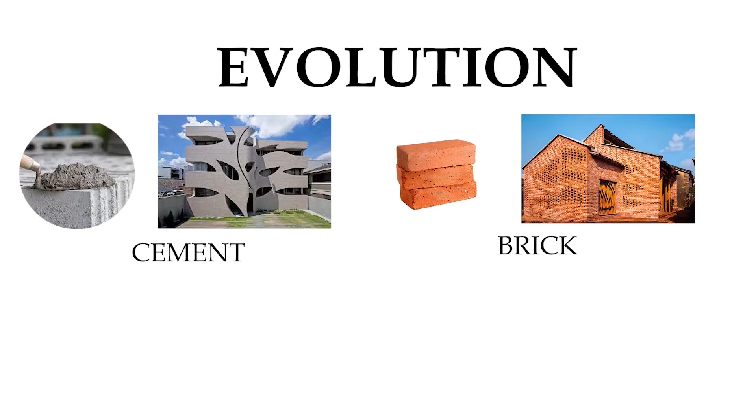Material is the integral part of building structure because building material signifies the structural existence, structural importance, constructional behavior, and also visual impact. There is an evolution of materials used for building constructions. Stones, leaves, branches, clay, mud were used in the primitive age. After that, some composite materials like cement, bricks, reinforced cement concrete with steel or other metals, concrete, etc. came. In our first and second semester, we have studied about cement, mortar, concrete, adhesives, and finishes.

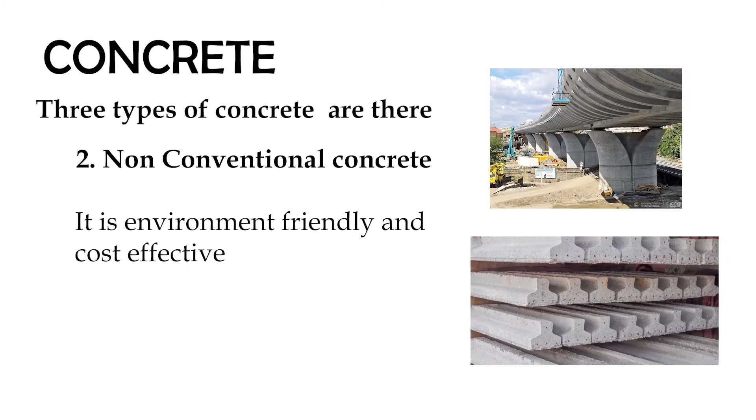Cement. It is much economical. It has a high thermal mass. Mortar. It is a binding material that binds building materials like bricks and stone into a solid. It protects building materials from fire in emergency. Concrete. Three types of concrete are there. Number one is conventional concrete, which was initially expected to resist only compressive loads. Number two is non-conventional concrete, which is task-specific, environment friendly, and cost-effective.

Number three is pre-stressed concrete, which is a form of concrete where initial compression is given in concrete before applying the external load. Adhesive. It is also known as glue, cement, paste, which is a non-metallic substance applied to one or both surfaces of two separate items. Finishes. These comprise plastering, pointing, painting, varnishing, and distempering. In our third semester, we have studied about the materials which are used for doors, windows, and damp-proofing course.

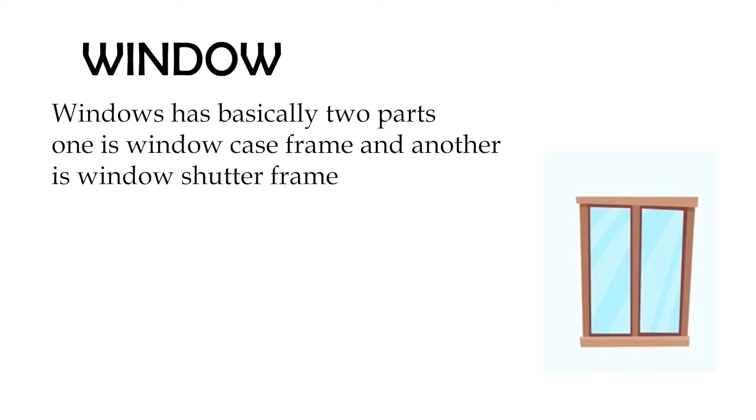Window. Window has basically two parts. One is window casing frame and another is window shutter frame. Window frames are made of timber, steel sections, aluminium sections, concrete, and stone. And the window shutter frame is made of timber, steel sections, and aluminium sections.

The door has also two parts. One is door casing frame and another one is door panel. Door casing frames are made of timber, steel sections, aluminium sections, concrete, and stone. Door panels are made of timber, mild steel sheet, corrugated steel sheet, hollow metal, metal covered plywood. Damp-proof course. Damp-proofing is a course which protects a building from moisture for a long time.

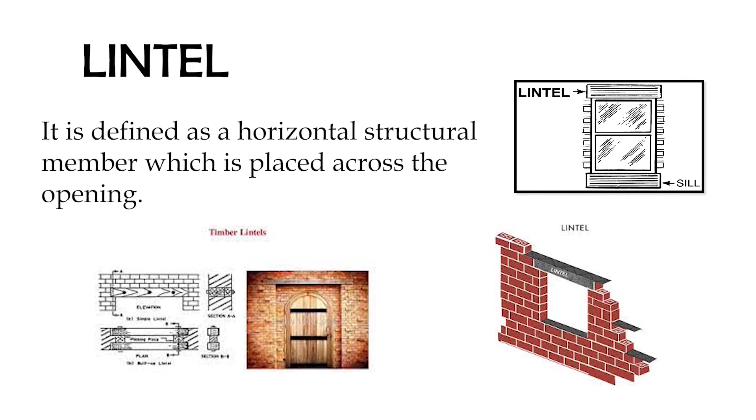In our fourth semester, we have studied about lintel. It is a horizontal structural member which is placed over the openings like doors and windows. Timber, stones, bricks, reinforced concrete, steels, and reinforced bricks are generally used in lintel. We have studied about arches also in our fourth semester. Various types of materials like bricks, stones, wood, monolithic concrete, precast concrete, reinforced cement concrete are used in arch construction.

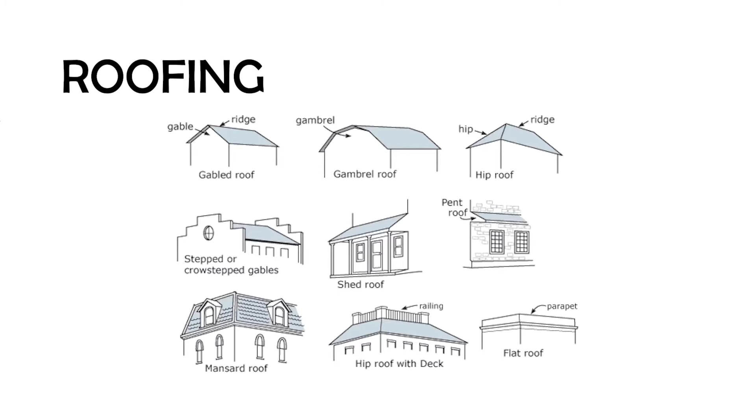In fifth semester, we have studied about partition wall. Generally, the materials used to construct partition walls are reinforced brick, hollow and clay brick, glass, straw board, plaster slab, metal lath, AC sheet, wood, lumber, etc. Roofing was also studied in our fifth semester. Roofing is an essential part of a building construction. Roofing material is mostly dependent on the climatology of the location of the building.

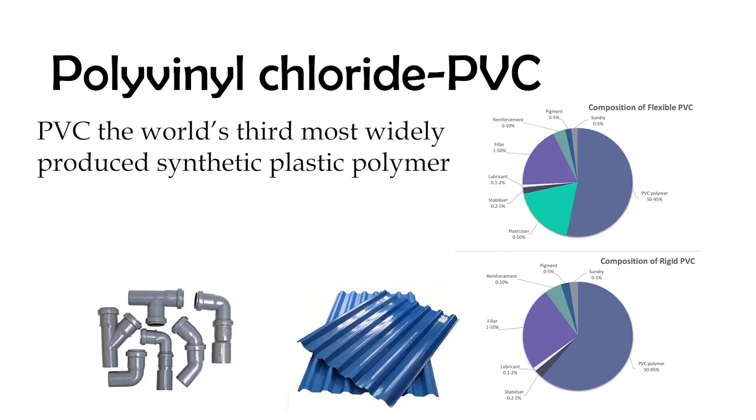There are also some new materials that are being introduced in the market. These are known as advanced materials. These materials include polyvinyl chloride, fiber reinforced plastic, etc. Polyvinyl chloride is the world's third most widely produced synthetic plastic polymer. It consists of 57% chlorine and 43% carbon. Fiber reinforced plastic is also an excellent choice of material for the construction of chemical storage tanks, piping systems, etc. There are many other materials that are more durable and fire resistant than the older materials we generally know now.

Foundation. In our third semester, we studied about foundation and its types. Foundation is a substructure placed underground that anchors the building to its position. Foundations are of two types: shallow foundation and deep foundation. Shallow foundations. These are mainly used in low rise buildings.

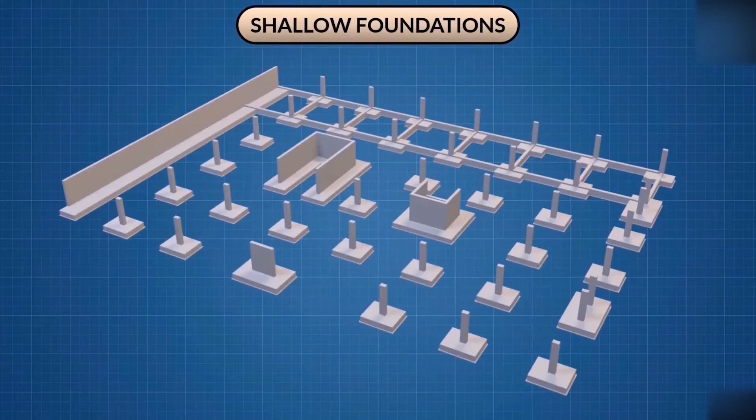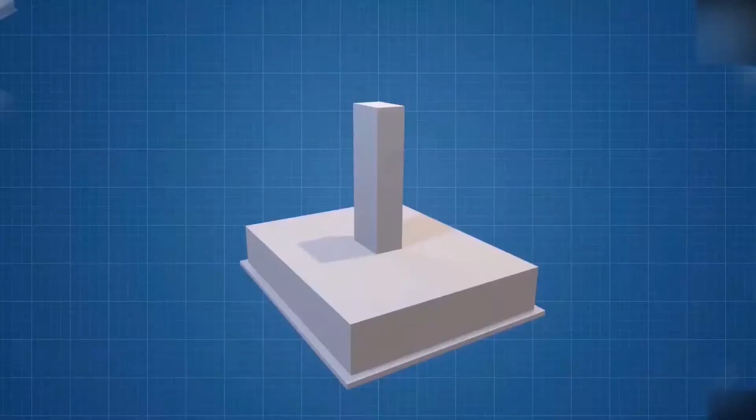The foundation takes the load from superstructure in the form of vertical or lateral loads or moments. In return, the soil exerts a reaction force upwards that tends to bend the base. Top part comes in compression and bottom part in tension. Therefore, the main reinforcements are provided in the bottom. This is how the reinforcement steel bars are provided.

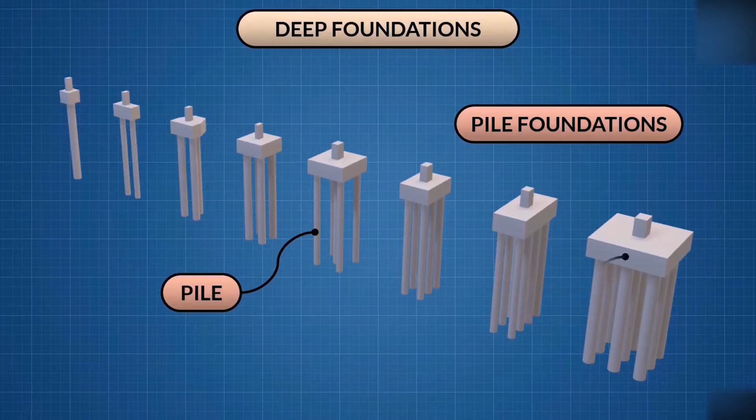Brick bonds. In third semester, we have studied about brick bonds and its various types. Brick is a type of block composed of dried clay which is used to build pavements and other various elements of masonry construction. The largest surface of brick is called stretcher. The shorter surface is called header, and the depression of top surface is called frog.

Four types of brick bonds are generally used in brick masonry. Number 1 is stretcher bond. Number 2, header bond. Number 3, English bond. And number 4, Flemish bond. Stretcher bond is the commonest bond used today and the least interesting in appearance. It is used mostly in interior settings because of its thickness of one half of a brick.

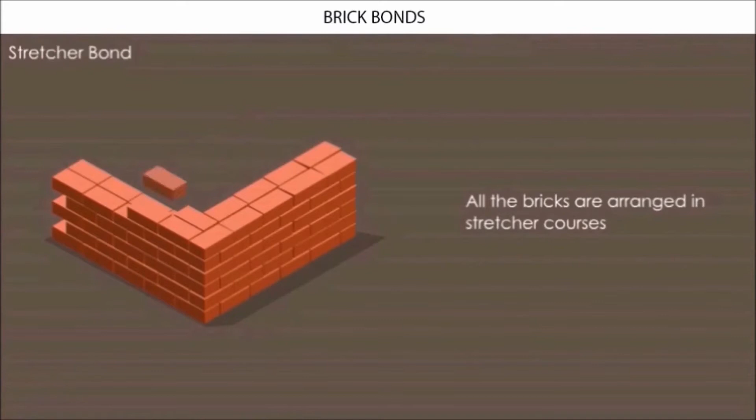Header bond is a masonry bond consisting of header courses exclusively. It is mostly used for residence and safety partition garden boundary wall. English bond consists of alternate courses of header and stretcher bond. This is the most commonly used bond for all wall thickness. In this bond, the vertical joints of the header courses come over each other. Similarly, the vertical joints of the stretcher courses also come over each other. This bond is considered to be the strongest bond.

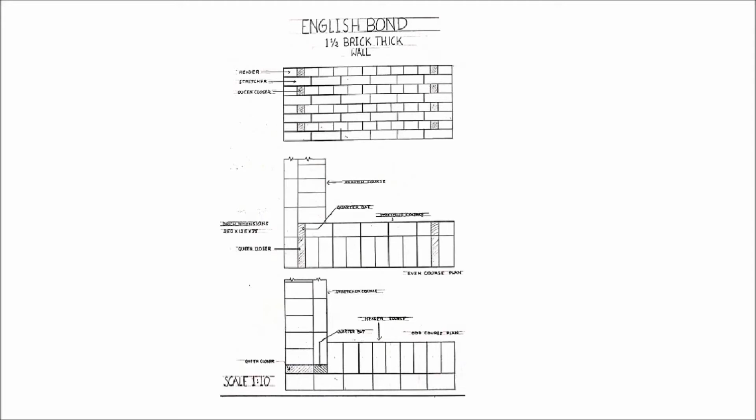In English bond, every alternate header comes centrally over the joint of two stretchers in courses below. Walls of even multiple of half bricks, for example 1 brick thick wall, 2 brick thick wall, present the same appearance on both faces. Walls of odd multiple of half bricks, for example 1.5 brick thick wall, 2.5 brick thick wall, will show stretchers on one face and headers on the other face.

Another one is Flemish bond, which is a brick construction pattern of alternate stretchers and headers for each course. This is very acceptable because it is economical, as brickbats are used. On the other hand, more mortar is used due to use of bats. But it is hard to build and it is comparatively less strong for the wall thickness of more than 30 centimeters. In Flemish bond, partly continuous vertical joints appear in the structure.

Double Flemish bond has a similar appearance from both sides of the face in the front and back elevation. In single Flemish bond, the exposed surface of the wall consists of the Flemish bond and the backside surface consists of English bond in each course.

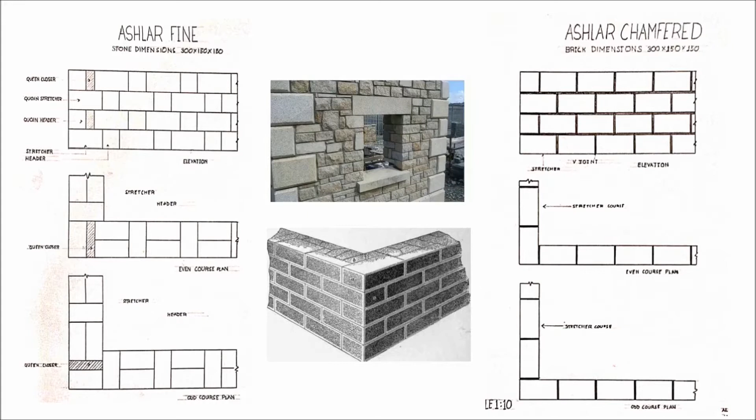This is stone masonry. We have studied about stone masonry and its types in our third semester. Stone masonry is basically of two types. One is ashlar masonry and another one is rubble masonry. Ashlar is finely dressed stone. In ashlar fine masonry, each stone is cut to uniform shape. In chamfered masonry, a strip is provided to 25 mm depth at 45-degree angle. That's why the exposed face is chamfered.

Rubble masonry is a type of stone masonry in which the stones used are obtained from nature. It is rough dressed with wider joints, in contrast to ashlar masonry wherein stones are given a fine finish and joints are also kept thin. Rubble masonry is more preferred than ashlar because there is a difficulty in dressing most types of stone. And for economical construction also, ashlar masonry is quite costly. That's why rubble masonry is more preferable than ashlar masonry.

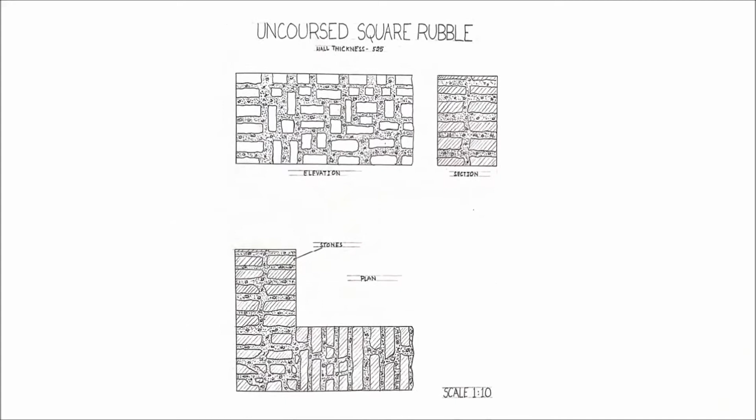Rubble masonry is of two types. One is square rubble masonry and another one is polygonal irregular rubble masonry. In square rubble masonry, stone faces are given a straight finish. Voids are filled with mortar and stone chips. In polygonal rubble masonry, the stones are roughly hammered and pitched into irregular polygonal shapes.

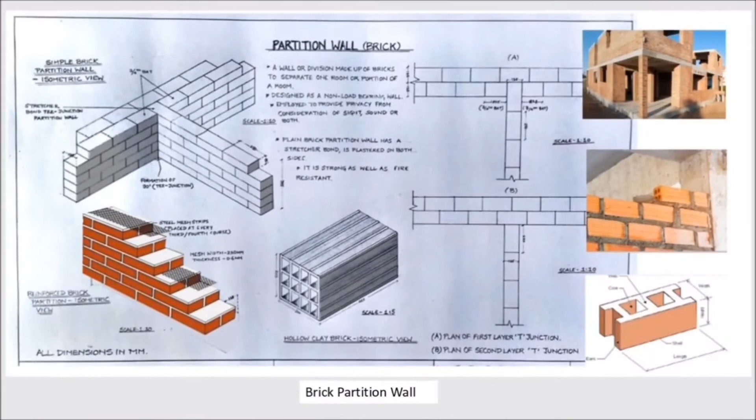These are some photographs of hollow clay blocks, which are generally made up of clay or terracotta and are hollow on either sides. In reinforced brick, wire mesh or hoop iron or steel bar is provided.

Plaster and concrete partition is constructed by setting 2 by 2.5 cm channels vertically and fixing metal strips. Strips are galvanized with iron wire or mild steel bar. It can be either precast or cast in situ. Special concrete posts are used for the construction of this wall.

Timber partition wall consists of a wooden framework which is either supported on the floor or on the side wall and is not suitable for damp locations, neither soundproof nor fireproof, lighter in weight and easy to construct.

Timber framed glass wall consists of glass surrounded with a combination of solid and engineered wood. This type of wall consists of a wooden framework and this type of wall provides good aesthetics.

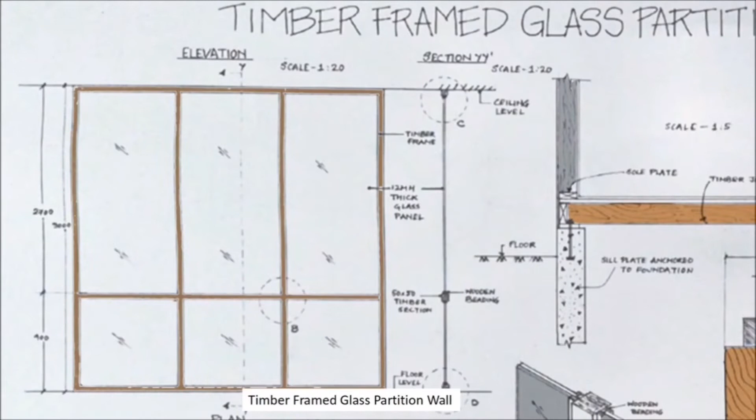For steel frame glass partition wall, the framing is done with steel and this provides maximum sound insulation and security. Mostly, this wall can be seen in modern offices, restaurants and cafes.

This slide is about composite glass partition walls. The walls are built of a combination of 2 or more masonry units of different types of materials that are bonded together. This is a video about the installation process of composite glass partition wall.

At first, steel framework is done and then plaster boards are used on both sides. As a modular, versatile, demountable panel, they can be quickly erected to any configuration required and come in a variety of specifications. Next slide is about GI frame drywall partition wall.

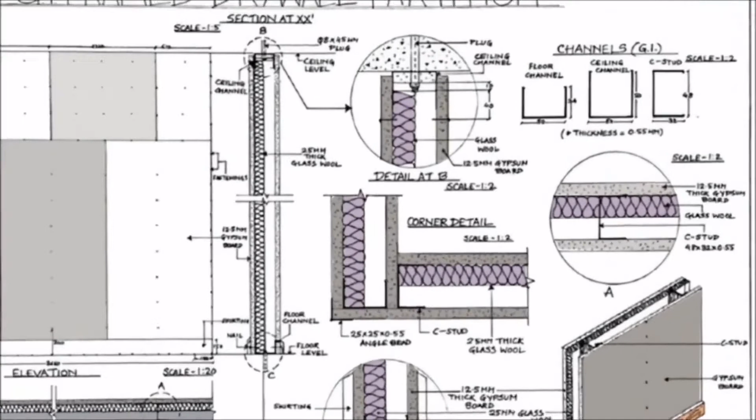Drywall materials include plywood and wood pulp, asbestos, cement board and gypsum. This is a soundproof wall. Double layered drywall partition walls, as the name suggests, have a double layer of drywall. Double layers increase the mass and increased mass increases sound deadening. The benefit of a double layered drywall is less noise penetration. Here is a short animated video about the construction process.

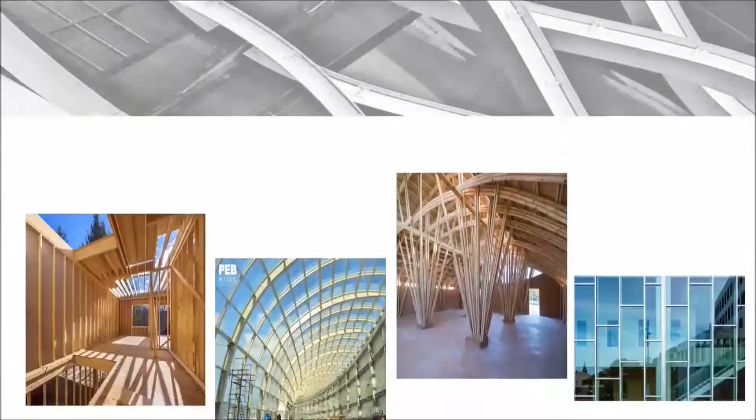Advanced building materials represent a new generation of construction materials which demonstrate exceptional properties. Through this, new technologies are integrated into both residential and commercial buildings and infrastructures to make them smarter, more sustainable, energy efficient, and secure. The following sheets are based on our assignment to design a stage backdrop.

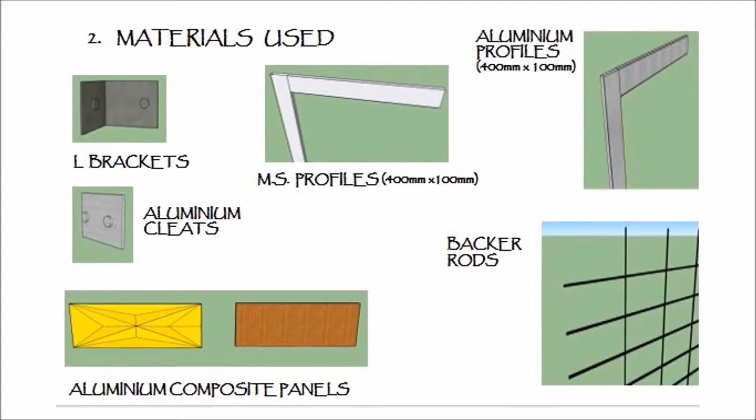The aim of the design was to make a simple but eye-catchy backdrop for the stage by only using aluminium composite panels. The mostly used materials are L bracket, MS profile, aluminium cleats, backer rod, and two types of ACP sheets. The first type is extruded gold finish, and the second one is the wood finish flat ACP. In this exploded view, we can see each layer of the total composite wall.

Here are the fixing details. At first, L brackets are fixed on the wall, then the basic framework is created using the MS profile, which is then overlapped by aluminium profile. Then, ACP sheets are placed, and backer rods are run between the grooves.

The design has been done around the idea of contrast and texture. The contrast developed between the shiny extruded and matte finish flat appearances of the ACP is the main design concept. The band of wood finished ACPs running in between the gold ACPs breaks the monotony of the backdrop while also emphasizing the whole design. The 3D form of the ACP panels will create different visualizations of the backdrop.

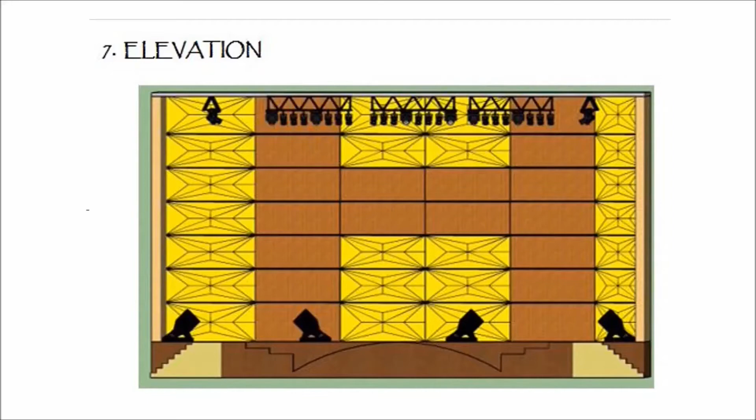We also collected a rough idea of the bill of quantities for this project. On the first sheet, we can see the elevation and the basic framework along with the skin section and details.

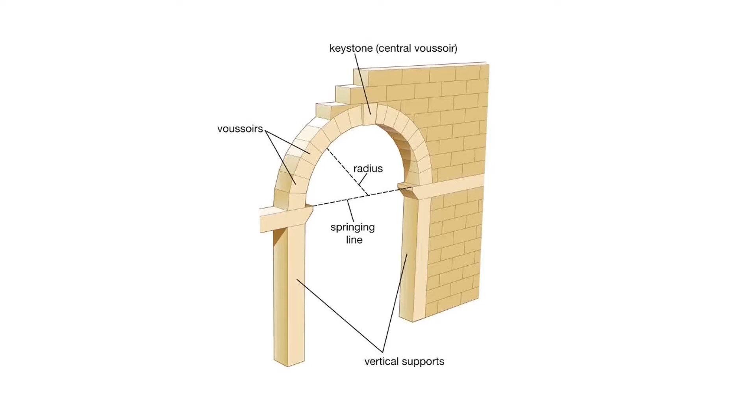In our fourth semester, we got to learn about the arches. An arch is a vertical curved structure that spans over an elevated space. It may or may not support the weight above it. These are the different parts of an arch which are shown, such as voussoirs, vertical support, keystone, springing line, and the radius. This is a sheet which is drafted by us in our fourth semester.

In this sheet, there are different types of arches such as semicircular arch, segmental arch, and flat arch. This is a semicircular arch. Semicircular arch is also known as Roman arch. This arch forms a half circle which is a major feature in all Roman architecture. A segmental arch is a type of arch with a circular arc of less than 180 degrees. It is sometimes also called a scheme arch. A flat arch is an arch with a flat lower or inner curve.

Some other types of arches are lancet arch, equilateral arch, horseshoe arch, three-centered arch, and four-centered arch. A lancet arch is one variety of pointed arch in which each curve of the arch has a radius longer than the width of the arch. Equilateral arch is a two-centered pointed arch in which the chords of the curve are equal to the span. Horseshoe arch is also called a Moorish arch or a keyhole arch. Horseshoe arch can take rounded or pointed or lobed form.

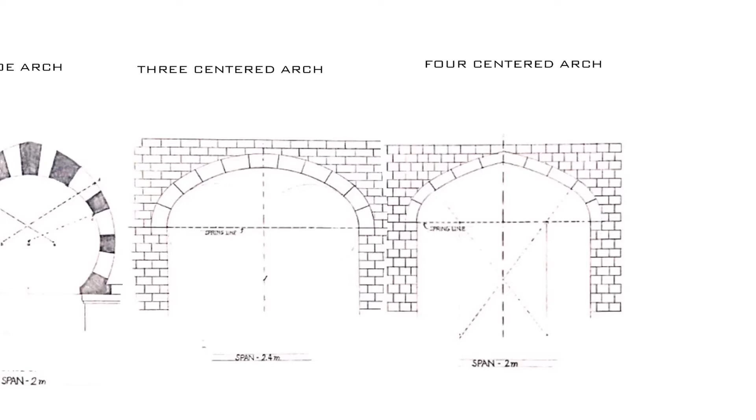Three-centered arch, an arch whose inner curved surface is struck from three centers, resulting in a shape of one half of an ellipse. Four-centered arch is a low, wide type of arch with a pointed apex. Its structure is achieved by drafting two arches which rise sharply from each springing point on a small radius. Now there is a small video on how a lancet arch is built. The vertical supports are created and then the voussoirs are placed from both sides of the curve, and at the end there is a keystone which is placed at the center.

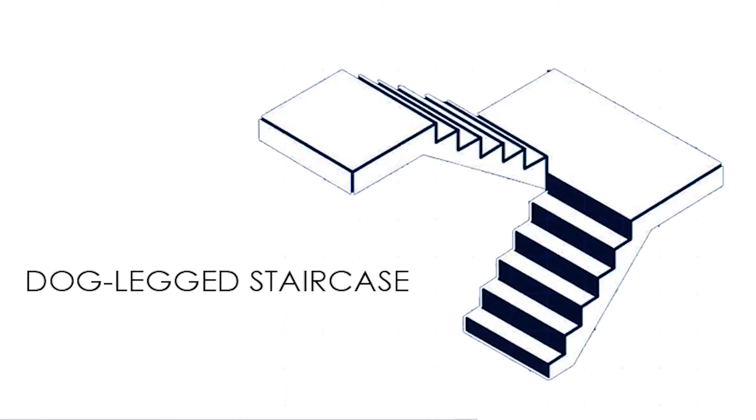Staircase. In our fourth semester, we studied about staircase. The different types of staircases are L-shaped, dog-legged, spiral, circular, bifurcated, and straight. L-shaped staircase. Dog-legged staircase. Spiral staircase. Circular staircase. Bifurcated staircase. Straight staircase.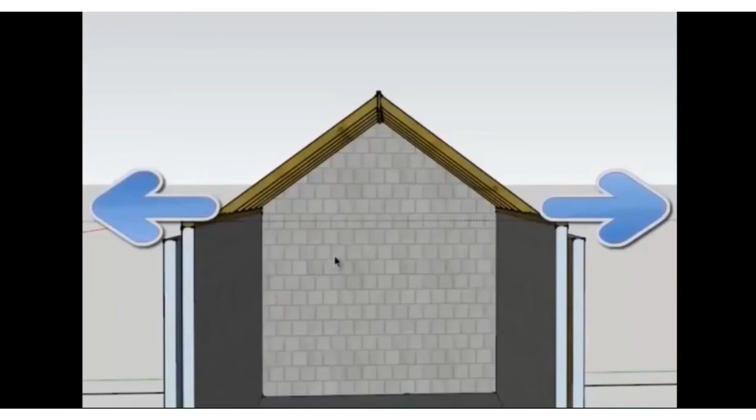In our fourth semester, we got to know about the pitch roof and its building techniques. What is a pitch roof? A pitch roof is a roof that slopes downward, typically in two parts, at an angle from the center ridge. Here are some of the sheets drafted by us in our fourth semester which contain the detail of pitch roof and its different parts. This sheet contains the plan of the pitch roof, the section of the pitch roof, the detail of the edges of the pitch roof, and some elaborate leveling of the drawing of pitch roof. In this sheet, we can see a different type of pitch roof which is covered with interlocking tiles, and its main members, that is the supporting parts, are rafters and joists.

So now there is a small video regarding the roof construction technique in which we are using joists and rafters for the roof construction. Rafters are rectangular section and they fit nicely on the wall plate. Another type of section used in construction of roof are purlins, which are associated with the struts, and they provide extra support to the rafter, hence adding extra strength to the roof. The purlins are found at right angles to the rafter and association with the struts is found on every fourth rafter. Then there are hangers which are found at right angles to the joist, keeping a strong roof.

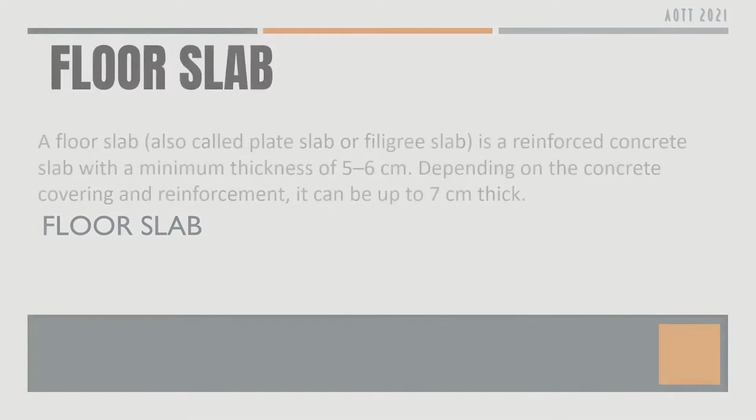In the following slides, we are going to learn about the floor slabs which we have learned in the 4th semester. A floor slab is also known as plate slab or filigree slab. This slab is a reinforced concrete slab with a minimum thickness of 5 to 6 cm. Depending on the concrete covering and reinforcement, it can be up to 7 cm thick. Now in this slide there are shown steel joists. The steel joists are open web lightweight steel trusses consisting of parallel chords and a triangulated web system, which are proportioned to span between bearing points.

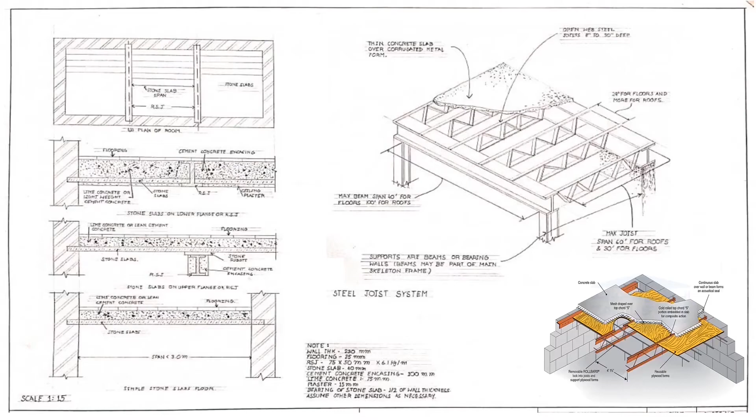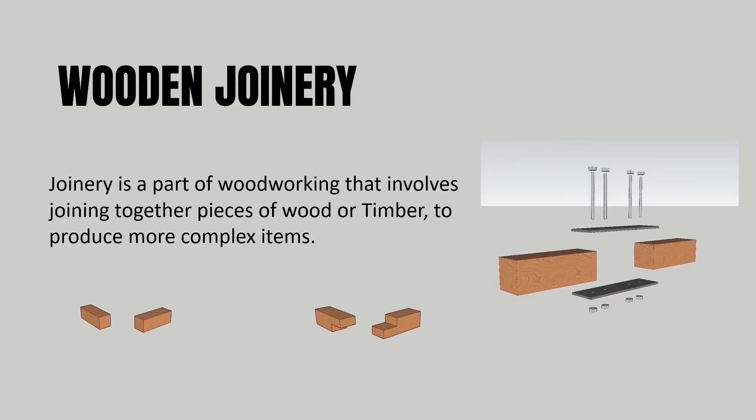We have learnt about the types of wooden joineries and the construction system in the 2nd semester and the 3rd semester. A joinery is a part of woodworking that involves joining pieces of wood or timber that helps to produce more complex items. We have studied the making of these wooden joineries in the 3rd semester.

First, in this slide a fish joint is shown. When it is desirable to join two members without reducing their section to a certain extent, then that joint, as shown in the figure below, is known as a fish joint. Here are some of the animated videos that show the construction of the fish joints, strap and bolts joint.

In this slide we can see the table splice joint, butt joint and lap joint. Table splice joint is another variation of the half lap joint. Butt joint: the end of a piece of wood is butted against another piece of wood, then this joint is known as the butt joint.

Now comes the lap joint. When the end of a piece of wood is laid over and connected to another piece of wood, it is known as the lap joint. Also, these videos help us to explain the construction systems of the table joint, matched joint and V-joint.

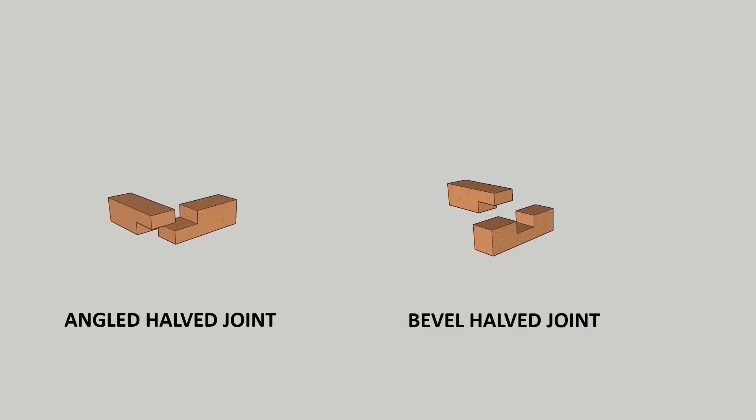In this slide we can see the types of widening joints. Widening joints are used to make wider boards by joining the narrower ones edge to edge. These videos help us to understand the construction systems of the angled halved joint and the bevel halved joint.

Now in this slide there are shown many types of joint like a dovetail joint, a notch joint, mortise and tenon joint, chase mortise joint. A dovetail joint or a simple dovetail is a joinery technique which is most commonly used in carpentry, which includes making of the furniture, cabinets and traditional timber framing. Mortise and tenon joints are strong and stable joints that can be used in many projects.

Here are some of the animated videos and also the video of our respected teacher showing the construction of a dovetail joint, also the animated videos of the types of dovetail joint.

In this slide we can see many types of joints like a housed joint, mitre joint, bird's mouth joint, oblique tenon joint. The housed joint: in this joint, the whole end of one piece of timber is accommodated or housed for a short distance into the other piece, one of which our respected teacher is showing the construction system.

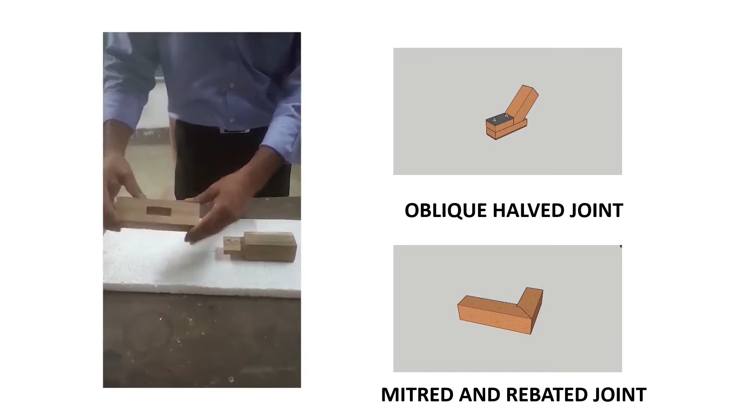We have learned about doors and windows in the 2nd and 3rd semester of our course. In this slide, we can find a typical ledged door and a typical ledged window. Frame: it is an assembly of horizontal and vertical members forming an enclosure to which the shutters are fixed. Shutters: these are the openable part of a door or a window. Head: this is the top or uppermost horizontal part of a frame.

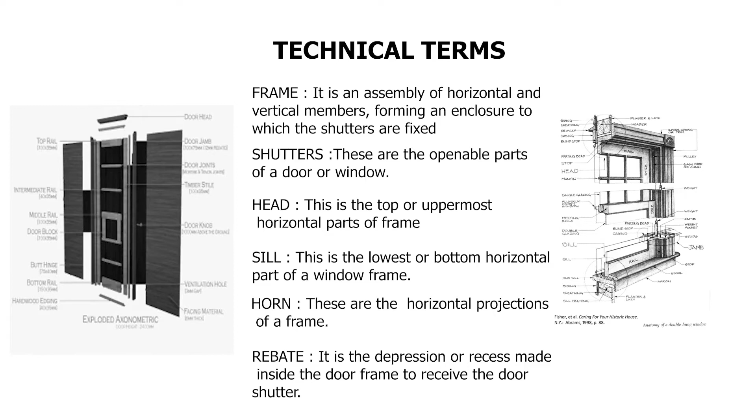Sill: this is the lowest or bottom horizontal part of a window frame. Horn: these are the horizontal projections of a frame. Rebate: it is the depression or recess made inside the door frame to receive the door shutter.

There are different types of windows with different structure and function, such as fixed windows, casement windows, awning windows, double hung windows, etc. Let's have a look at the ventilation openings of the most common window types. Fixed windows, no matter what size, offer no ventilation at all.

Next is the awning window, which severely limits the amount of opening and offers very little ventilation with respect to its size. And for the larger ones, the lower panes are normally fixed, which further reduces the amount of ventilation. Sliding windows have a fixed pane of glass which prevents ventilation. In larger ones, additional fixed panes can be found which further restrict the ventilation.

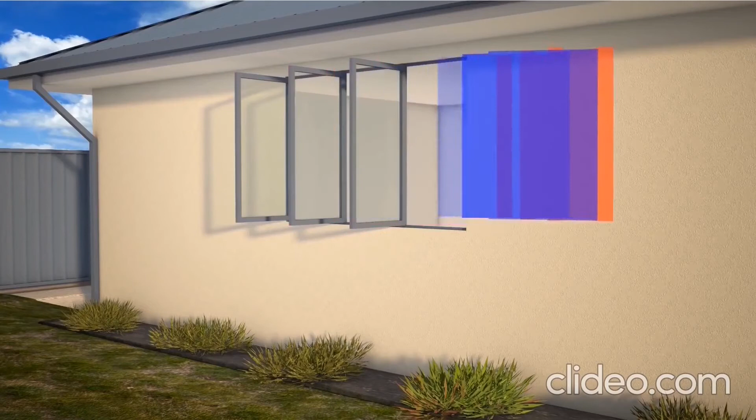In double hung windows, half of the window pane is fixed, so the ventilation through it is moderate. For larger ones, the portion of the fixed panes increases and the ventilation amount decreases. As casement windows open perpendicularly, they allow ventilation through the entire window area. For larger ones, 1/3 of the window pane is fixed and that decreases the amount of ventilation.

Louver windows have no fixed panels; the blades open horizontally. This type of window allows ventilation through the entire part of it. Even in the large ones, the amount of ventilation is comparatively higher than any other windows. So, if we represent graphically the amount of ventilation these kinds of windows offer, here comes the result.

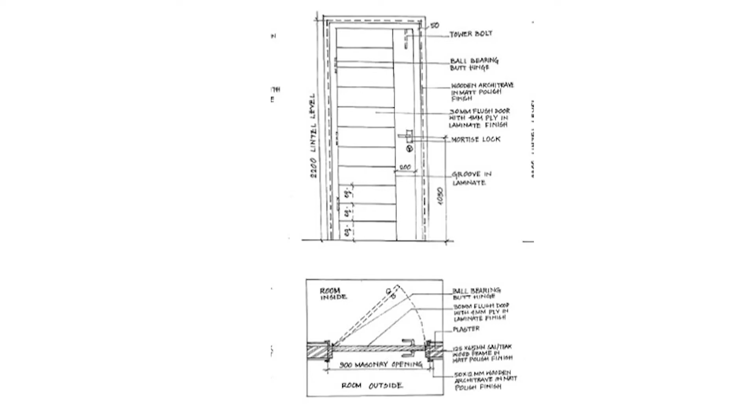The size and materials of a door may vary as per the location and their requirements. For a toilet, the door size is kept the minimum, where for a room it is moderate, and for other areas the size of a door increases. The materials and size of a door depend on the users of a particular place.

We have also learned about choosing the location of a door or a window. For the best space utilization, the number of doors should be kept minimum, but at least 2 openings should be there. If there are 2 doors in a room, the doors should preferably be located in opposite walls facing each other so as to provide good cross ventilation and free circulation of air in rooms.

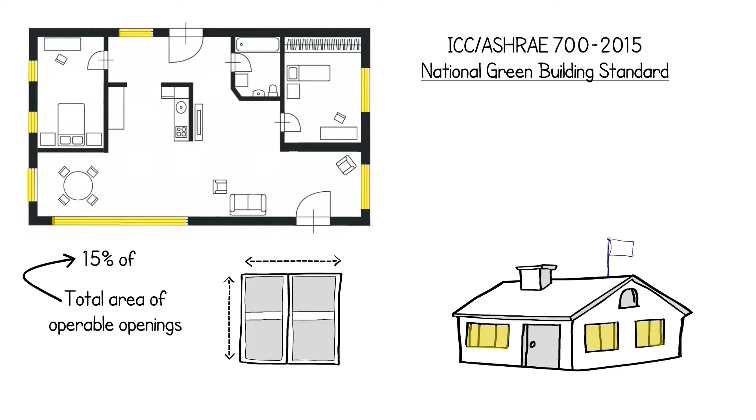If the windows are placed adjacently, the cross ventilation works very less. If in a room the openings are in only one wall or the windows are placed adjacently, in that case, the possibility of cross ventilation becomes very limited. According to the National Green Building Standard, for proper ventilation, the size of the window should be 15% of the total conditioned area.

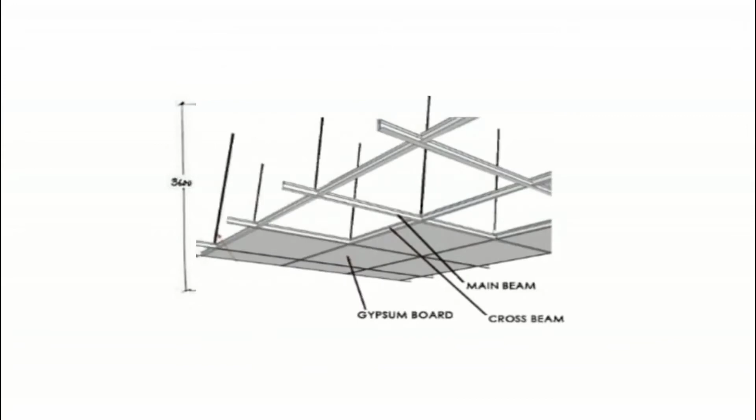In this sheet, we have drawn all the details of gypsum board drop ceiling. This is basically used for acoustical purposes in the theatre hall as it has high sound absorption property. It is lightweight, flexible, and fire and moisture resistant. Gypsum board panels are tough and economical and are fast replacing other ceiling materials such as plaster of Paris, as they are used for renovating old ceilings too.

Working drawing. Drawings for the proper construction of a building, for carrying out the various trades in accordance with the design or intention of the architect, and for obtaining estimates of cost. They will consist of plans, elevations, sections and details augmented with specifications. Purpose: the primary role or function of working drawings is to convert design data into construction information and to clearly communicate that information to the building industry, code officials and fabricators.

Municipal drawing or sanction drawing. These are the drawings prepared for obtaining sanction for the project. The sanctioning authorities have their own checklist of drawings to be submitted. Purpose: to get sanction from the competent authority before starting actual work, to check whether the proposed construction is as per bylaws or not, to decide the taxation of the building by the municipal authority. Without sanction of drawing, any construction is illegal.

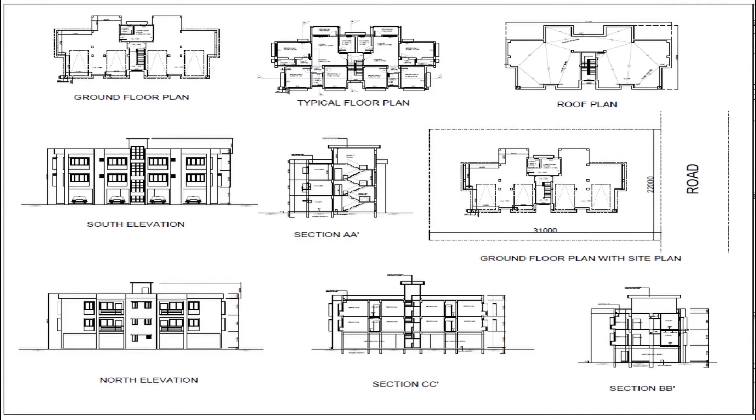In villages, the drawings are sanctioned by the panchayat, in towns by municipal bylaws and in cities by corporation bylaws. For getting approval of the plan, and even after approval, a number of copies are required for obtaining financial assistance, electric supply, water supply connection, etc. These copies of the plan can be obtained by ammonia print.

We have studied plumbing services in 5th semester. Public water supply consists of collection, conveyance, treatment and distribution. Water is conveyed from the street mains to the individual building through a service connection and collected in an underground tank. Service connection consists of two types.

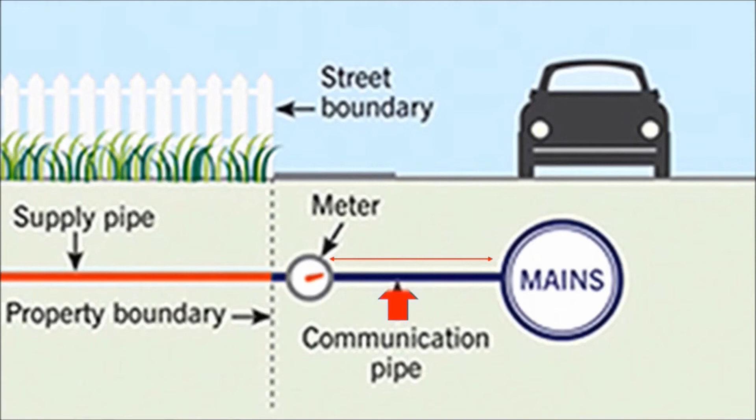Those are communication pipe and supply pipe. The pipe which runs from the municipal distribution mains to the boundary of the premises is known as communication pipe, and the pipe which runs inside the premises is called supply pipe. In this picture, we are able to see the details of service connection.

Internal water distribution system depends upon the size and height of the structure. These are the basic methods of distribution system depending on the pressure of the water and gravity. Direct supply system. In case of buildings which are not more than 2 floors and if adequate pressure is available in the mains, supply of water is directly given to various floors for sufficient hours. This method is called direct supply system.

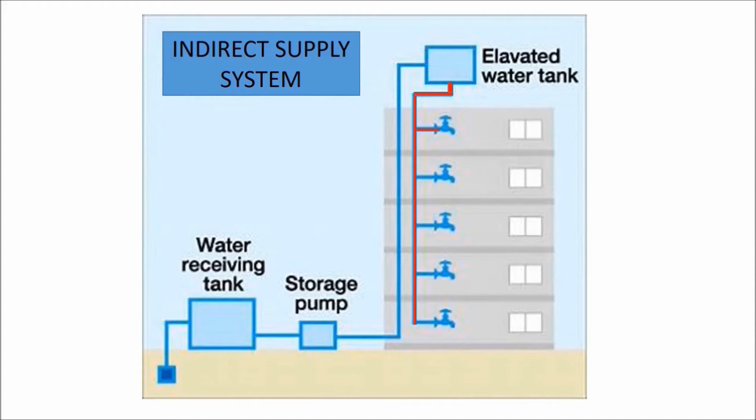Indirect supply system. When the pressure in the mains is not sufficient, the water is pumped directly to the overhead storage tank and from there water is distributed to different floors by gravity. Gravity system. In this system, water flows under gravity without use of any external energy to deliver water from source to consumer. Water distribution system for a town depends upon the level of the source, topography of the area and some other local condition. In this sheet, we have discussed about pumping system and combined gravity and pumping system.

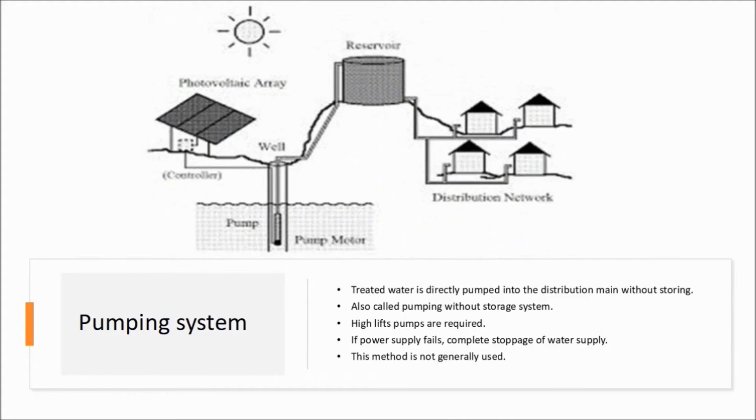Pumping system. Treated water is directly pumped into distribution mains without storing. This method is not generally used. Combined gravity and pumping system. This is the most common, efficient and economical. Treated water is pumped and stored in an elevated distribution reservoir. Then it supplies to consumer by action of gravity.

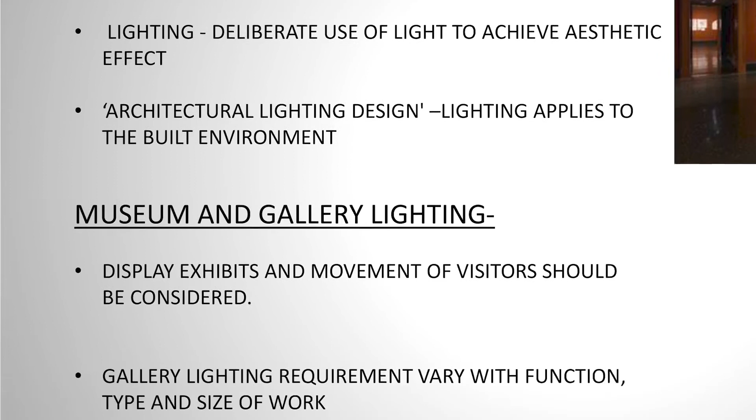Lighting in museum is important for displaying the exhibits and for the movement of the visitors. Gallery lighting requirements vary with function, type and the size of work. The whole presentation is based on these research statements. The methodology of lighting in museums is shown in this flowchart.

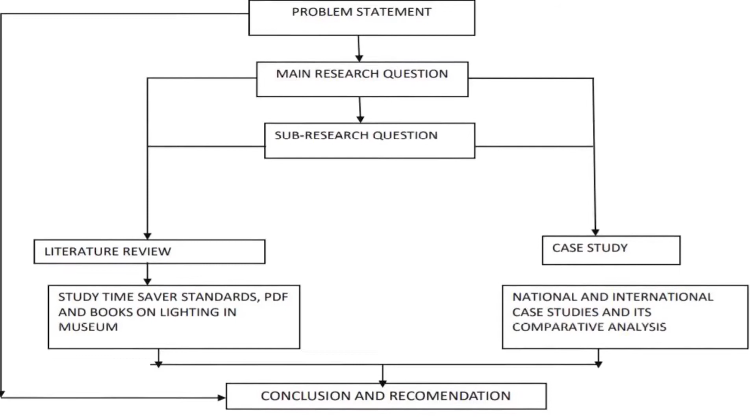When many different objects are displayed in a single exhibit, lighting designers must sometimes light the space so that certain objects are illuminated with bright or dim light, light that is warm or cool, using deep or shallow angles and a variety of fixtures and sources. As many art museum exhibits change frequently, lighting design must be flexible and easy to customize for new objects and collections. In two ways, museum lighting can be done: natural lighting, artificial lighting.

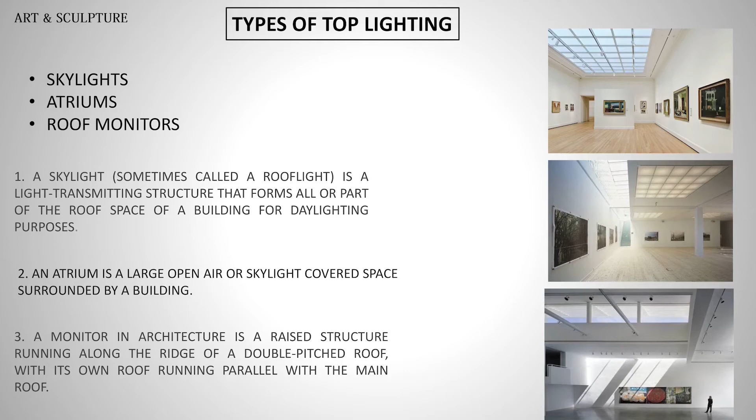Natural light plays a major role in museum construction and design. It is of two types: top lighting, lateral lighting. There are a few advantages and disadvantages of the top lighting system. There are three types of top lighting: skylight, atrium, roof monitor. Lateral lighting is provided either by ordinary windows or continuous opening.

Best ways to design windows in exhibition space are: 1. Favorable lighting from north, 2. Normal opening shadow on the wall, 3. Side lighting. There are 4 types of lateral lighting: 1. Vertical windows, 2. Horizontal windows, 3. Clerestory windows, 4. Window wall.

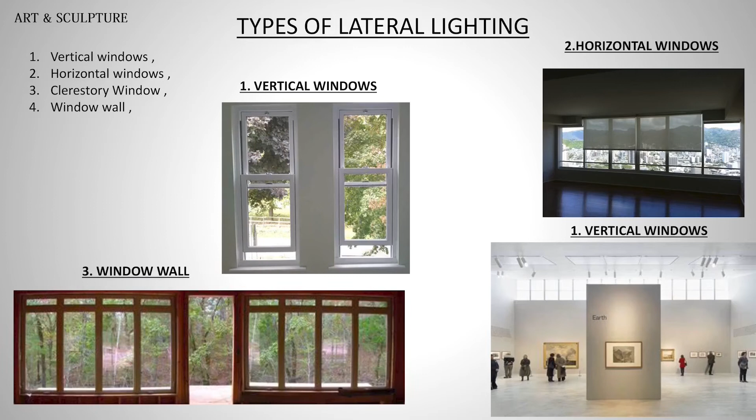The factors of daylight design considerations are as follows. 1. Site building to maximize daylight availability. 2. Building orientation. 3. Building form. 4. Use of low-rise buildings for greater daylight access. 5. Use of the atrium to maximize core daylight.

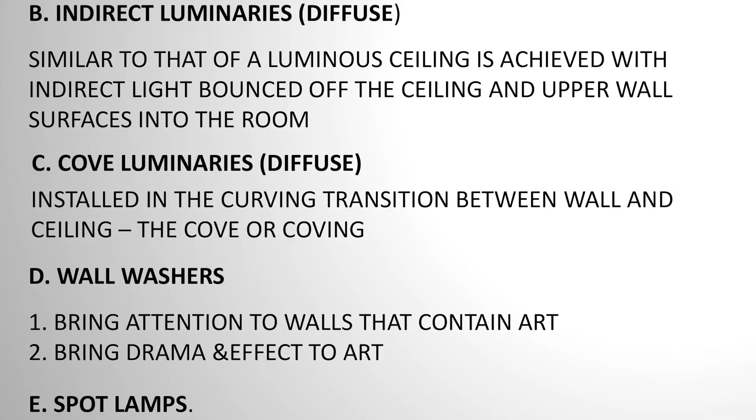Artificial lighting is the light that we get from the electric source. The form of the lighting can be divided into two types. 1. Diffuse lighting. 2. Directional lighting. Some different types of artificial lightings are luminous ceiling lighting, indirect luminaires, cove lighting, wall washer, spot lamps.

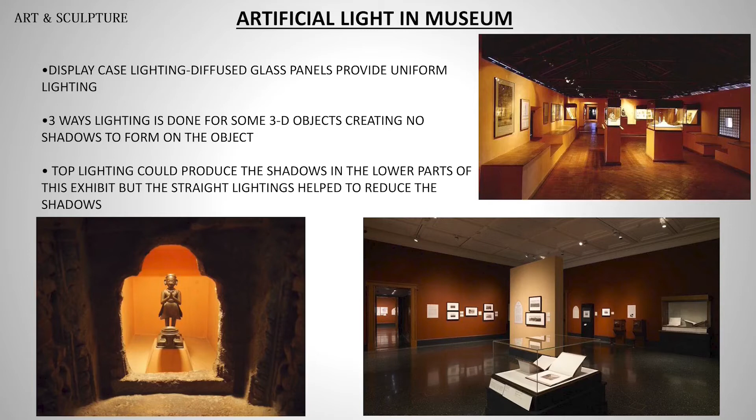Apart from creating a good visual environment for the audience, the museum's lighting environment should also focus on protecting exhibits and reducing the damage to cultural relics caused by light radiation. It is observed that lighting plays a decisive role in the display space.

Guggenheim Museum is a good example of where we can find fine use of natural and artificial lighting. The 45-degree plastic louvers have been placed to deflect the sun rays. For the best use of light, all the walls, including the floors and ceilings, have been painted with high reflectance matte white.

Lighting in general plays a very important role in architecture to develop an interaction between humans and a specific space. When it comes to exhibition areas, lighting has to be very carefully designed, as it should not only convey the brilliance of the exhibit but also maintain the overall lighting required. This is either done by natural or artificial lighting or by a combined strategy.

The intent of this research is to explore qualitative aspects regarding lighting that is used in museum architecture and the psychological impact of lighting on human behavior.

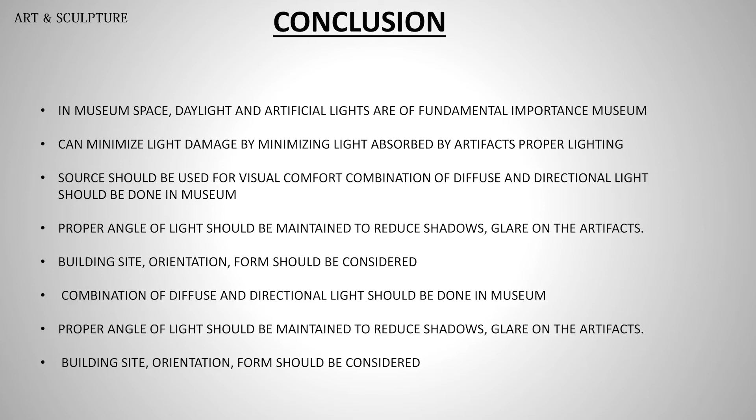In the 7th semester, we study structure in architecture. This subject teaches us about the different types of structural systems in advanced architecture. This is a sheet which was done by us. These are the classifications of form active systems: number 1, tent structure; 2, cable structure; 3, pneumatic structure; 4, arch structure.

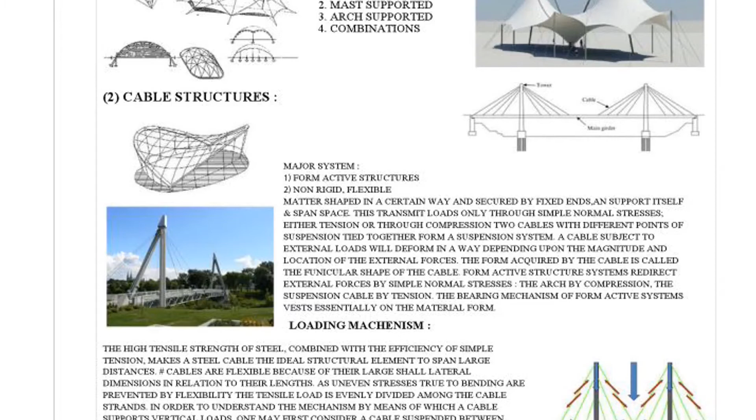Cable structure. It comprises non-rigid, flexible cables shaped in a certain manner and fixed at the ends to span the space. Pneumatic structure is a membrane which carries load developed from tensile stresses. Arch structure. An arch structure is a curved surface that spans over an elevated space. These are some of the examples of the structures we learned before.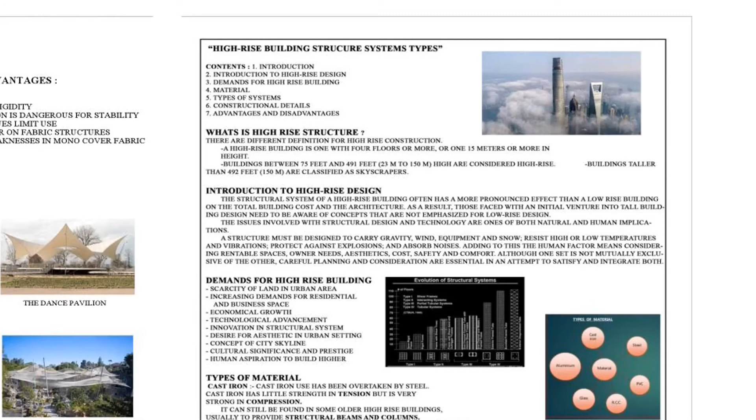High-rise building structures are buildings between 75 feet and 491 feet, and those taller than that are classified as skyscrapers. Some materials used in these buildings are cast iron, float glass, etc.

Section active structural system. These are systems of rigid solid linear elements in which redirection of force is effected. This structural system is further classified into beam structures, frame structures, and slab structures.

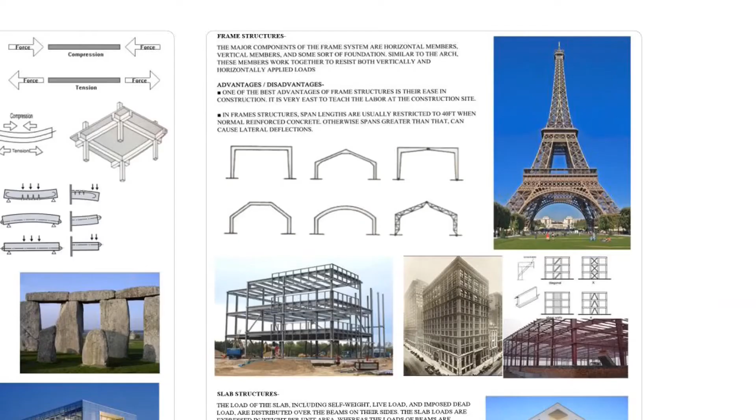It is a very sustainable structure that can bear a lot of load and does not break easily. There is a snack company called Pringles which uses this shape for the snacks, which makes the product non-fragile and keeps it intact so it does not get broken into small pieces. In the next slide, you will see a small video on this structure.

Climatology is the study of climate and how it changes over time. It is a very important aspect in architectural designing. These are a few basic concepts of climatology. Points on Earth's orbit show the climatic variation on Earth due to revolution around the Sun. Zenith and nadir are the two poles of the horizon.

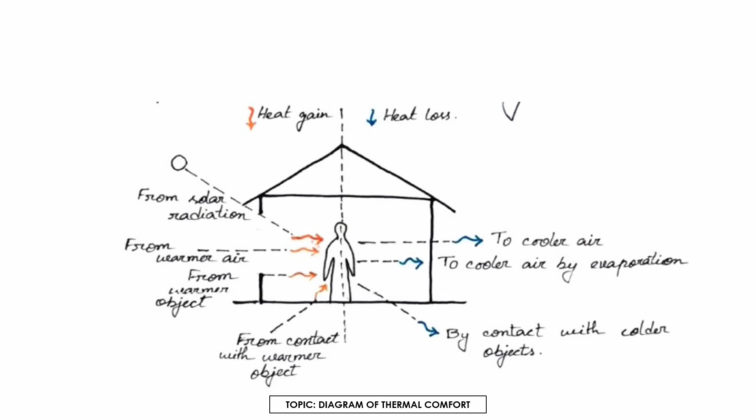Global wind pattern shows the different wind patterns of the northern and southern hemispheres. Radiation spectrum shows the different radiation, emphasizing the visible spectrum range. Sun path diagram to determine altitude and azimuthal angle. Diagram of thermal comfort, showing the ways of heat gain and heat loss inside a building. Types of ventilation for good airflow.

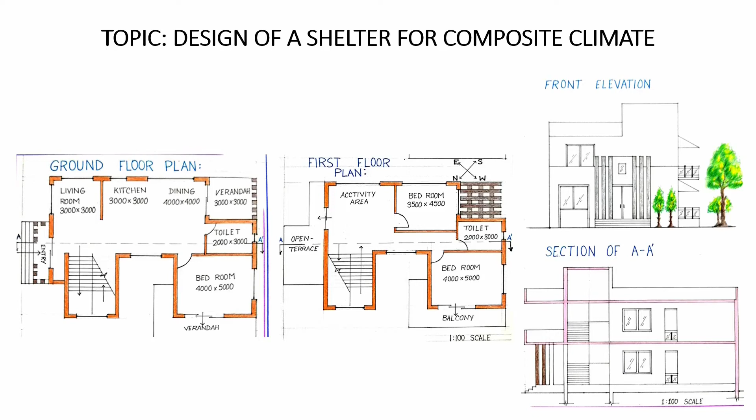Design of a shelter for composite climate. Composite climate displays the characteristics of hot and dry, warm and humid, as well as cold climates. The displayed plan and section was a quick class assignment given to us for better understanding of the application of climatology in architecture.

Fenestrations and shading devices. Shading devices are mainly of two types, horizontal and vertical. These are used to protect the interior of the building from excessive solar radiation and precipitation.

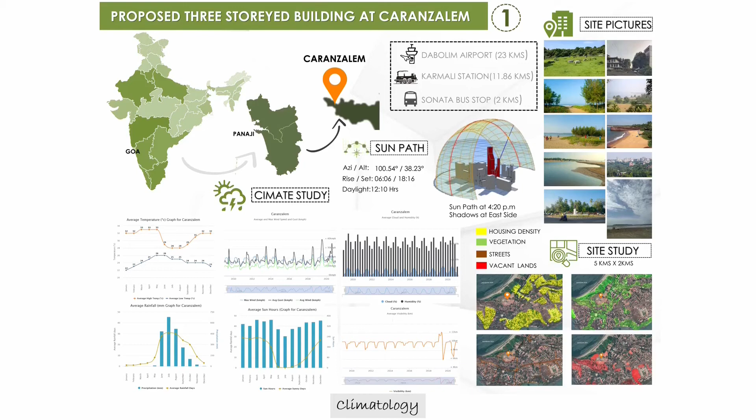We were assigned to design a climate-responsive building on a given climatic condition. The first project was to design a 3-storey building at Caranzalem, Goa. Goa features a tropical monsoon, warm and humid climate. The sun path diagram shows the daylight hours and the shadows obtained for any building. The graphs here show the average temperature, rainfall, wind speed, humidity and sun hours.

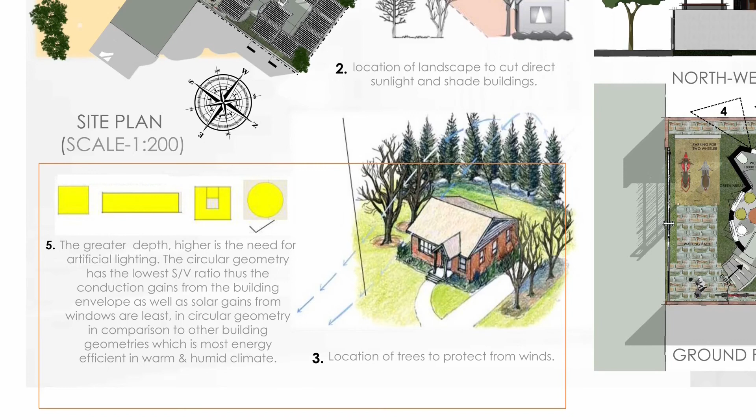Here are some pictures of the site and its locational details. After the studies, this is the proposed site plan. The concepts that were taken are plantation of dense shrubs and trees for blocking the summer setting sun and providing natural shade by cutting the direct sun rays. The positioning of the trees is kept such that it can cut the strong winds. The orientation of the building is kept north-south. The geometry of the envelope is kept circular.

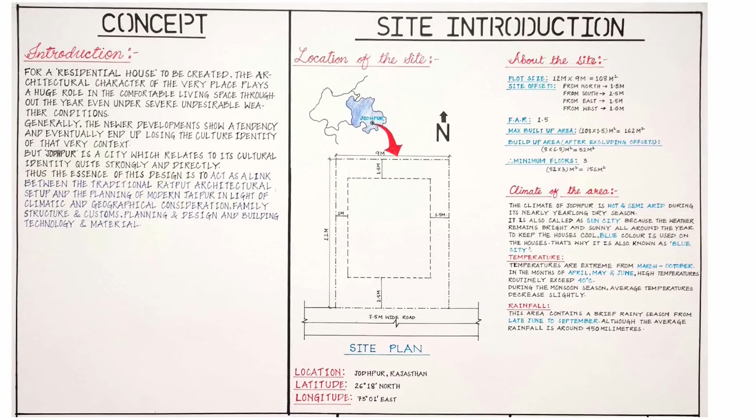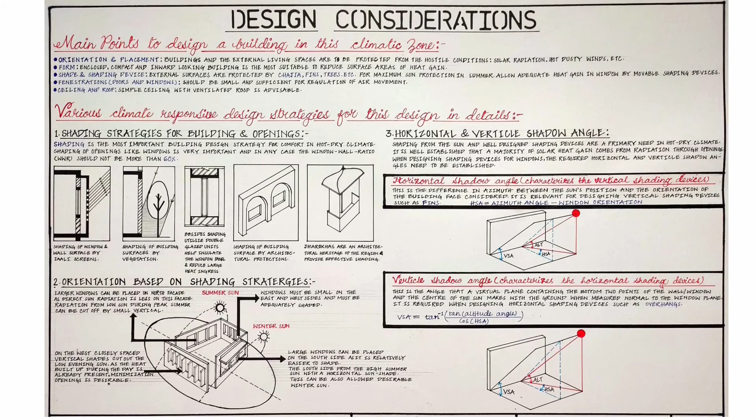The second project was to design a climate-responsive building for Jodhpur, Rajasthan. The climate of Jodhpur is hot and semi-arid. The concept was to design a residential building which portrays a blend of traditional Rajput architectural style with modern design approach that best suits the climate and the requirement of the users. These are some of the idea illustrations that are used for fenestration and shading.

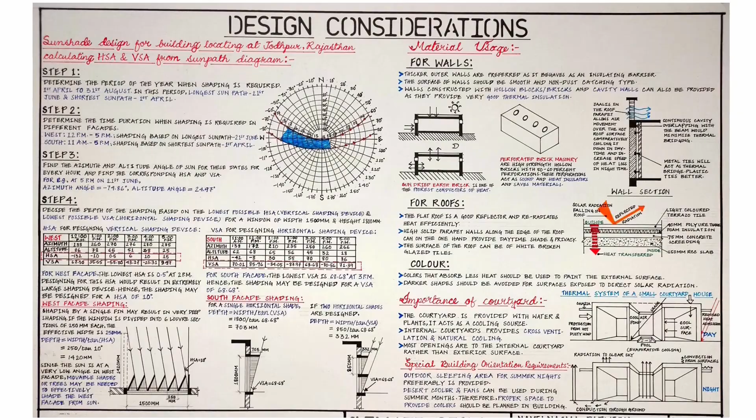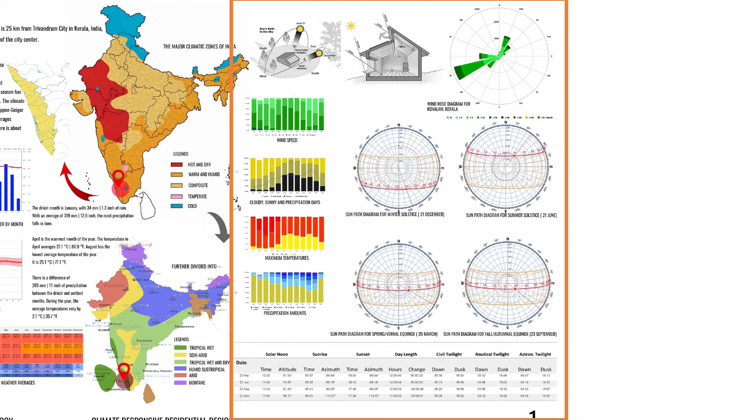The third project was to design a climate-responsive building for the climate of Trivandrum city, Kerala. The site was at Kovalam, having a tropical climate. Here are the climate charts showing the monthly weather condition, average temperature and precipitation. These are the sun path diagrams for winter and summer solstice and equinoxes. The design concept focuses on taking inspiration from the vernacular architecture of Kovalam and to integrate it with modern constructional techniques, and also to reduce the building's dependency on artificial energy.

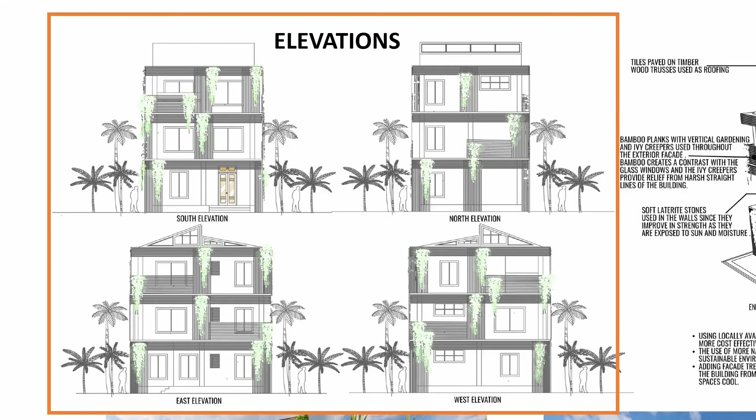Good afternoon everyone, and welcome back to Day 3 of AOTT 2021. I am Akshay Shah and I will be your host for today's event. Today we have some great performances for you to sit back and enjoy. So, without further ado, let's get straight into it. Today's event will begin with a dance performance on Shiv Tandav by Avantika Shah from first year.